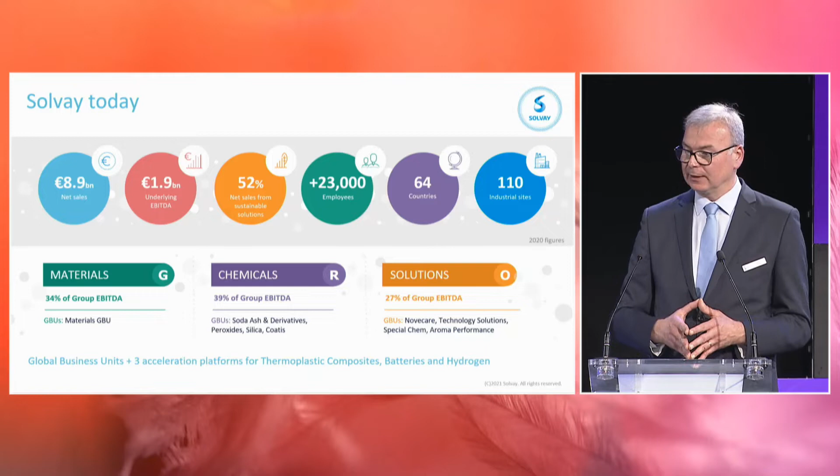One of the key differentiators we feel about Solvay is the pure breadth of materials that we offer. So not only the injection molding materials here on the left-hand side, the high-performance aromatic materials, but we also have fluoropolymers, which are used for high-performance sealing applications. The fluoropolymers are also used extensively in battery technology today. Solvay are one of the leading suppliers of fluoro solutions into battery cell chemistry. We then move into the composites, which we'll focus on today, both thermoset and thermoplastic. But we also have solutions covering adhesives, and we make our own carbon fiber technology as well.

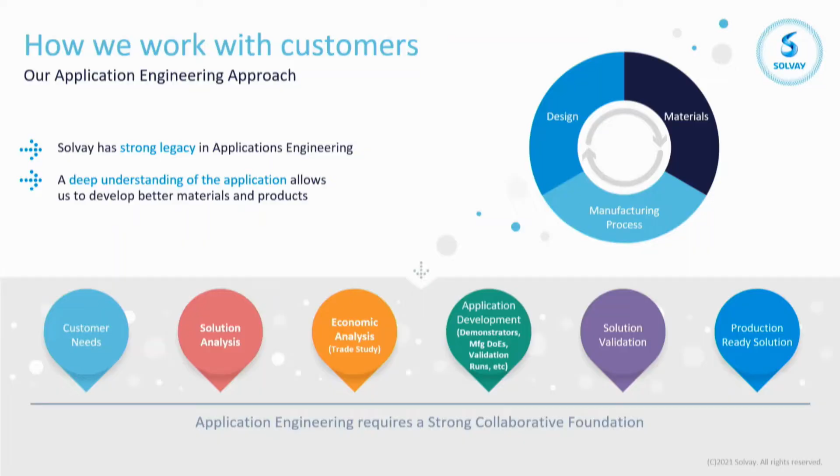One of the most important aspects of this particular project is our approach from an application engineering perspective. So we start right at the very start when we're talking about a concept, and we can support developments and conversations with customers all the way through to the final actual solution. This presentation today will focus more on the early part: understanding the customer needs and coming up with a solution that we believe will bring value.

Just to give you some insight, the second phase of the project, which will be completed relatively soon, will look more into the center of this chart. We'll be doing more of the trade study analysis and more of that deep application development. So again, that's further work that Solvay are working on, but this is our application development approach.

To actually do this work on battery enclosures: Solvay are experts in materials. We're not actually the experts in battery enclosures. Yes, we know a certain amount about battery enclosures and their technical requirements, but to really get deep into the technical content and start understanding the current pain points of customers, we had to work with somebody. We did screen a number of different companies, but in the end we worked with Ricardo on this project.

They're a well-known automotive design and engineering consultancy. They have the expertise in battery technology, not just in cells, but all the way through to battery enclosures as well. So on this project Solvay were bringing the material knowledge, and Ricardo were bringing the background on application performance and the current pain points that they saw on the market from their customers.

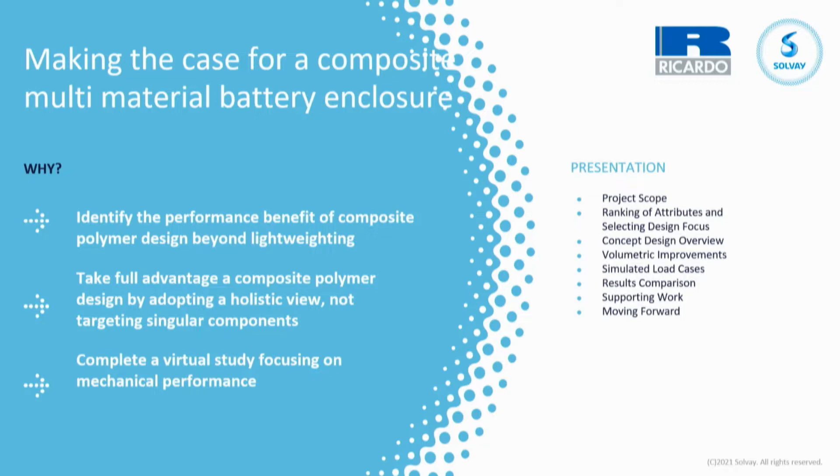So the one thing that I've already highlighted is we wanted to talk about composite materials and not just focus on lightweighting. Very often we see in the press that the value proposition of composite materials is presented as just lightweighting. So we wanted to take a step back and look at the solution at a more holistic level. We didn't want to just look at designing individual components.

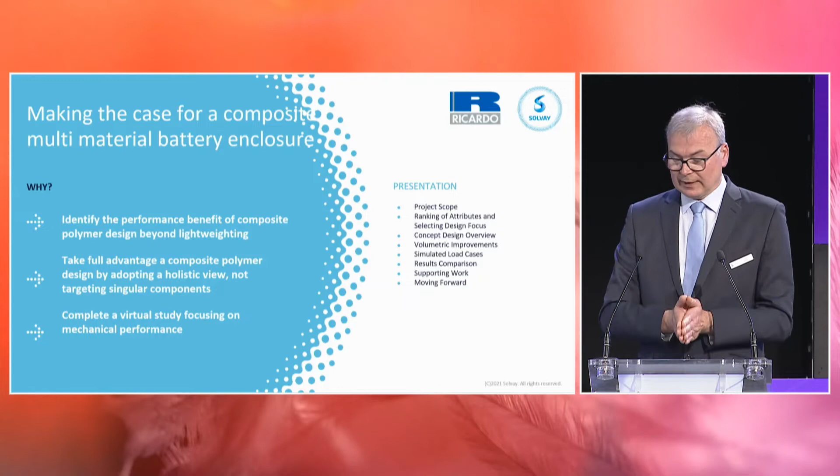We wanted to find out what the real issues were today, and then we could build almost like a mission statement around the project moving forward. The mission statement is important because it provides focus for all of the work that we did in developing designs and using all the advantages of composite materials to solve pain points of the incumbent metallic materials. So teaming up with Ricardo allowed us to have a very strong base.

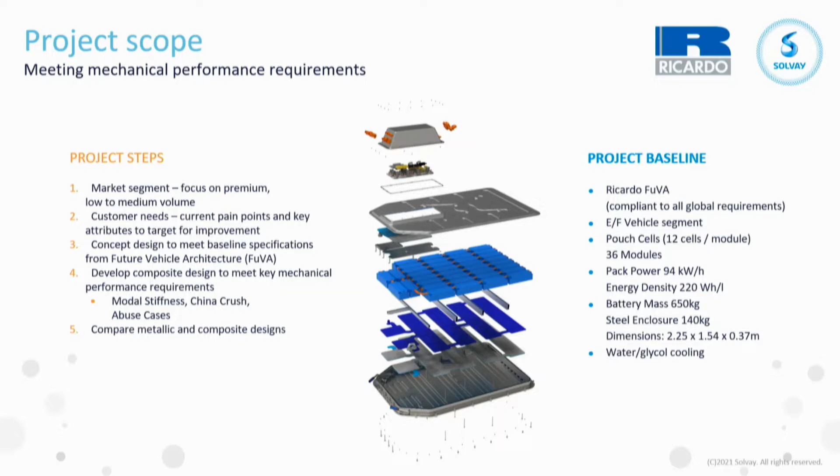The baseline is what is called the Ricardo FUVA battery pack. FUVA, F-U-V-A, stands for Future Vehicle Architecture. Ricardo do a lot of work directly with OEMs, and that work is obviously confidential. So Ricardo have developed their own electric vehicle that they can use to promote their own services and expertise. Working with Ricardo, they gave us access to their incumbent metal battery pack enclosure that is used on the FuVA vehicle.

When we start talking about our solution, we believe that we will be focusing more on the high performance or premium market segment, where we're looking at low to medium volume initially. We started off by really trying to understand what this part has to do, what are all its functionalities, and also what are the current pain points. That would really allow us to start thinking about how this design could look in a composite intensive design to start bringing some customer value.

So right at the end, once we have the design and we've been through this process, this mission statement, we are going to validate the performance again in a virtual engineering environment, but we're going to validate it against what we see as the key mechanical performances, the China crush, the modal stiffness, and some of the abuse shock cases. And at the end, what we will have is a direct comparison between the incumbent steel design and the composite design. So you see a little bit of information there around what the FUVA battery pack is.

It's what we believe is a larger SUV style battery pack. It actually has 36 modules, which you'll see as the blue boxes. In each of these modules, there are 12 pouch cells. Again, we know on the market there is lots of variation between pouch, prismatic, cylindrical cells. There are cell-to-pack scenarios. It's impossible to cover all of it, so you have to base it on something, and this was our baseline. So it's a battery pack with a power of 94 kilowatt hours.

Important here is that the steel enclosure is 140 kilograms in weight. The pack is quite a big pack, and it's a traditional water glycol cooling. So this is really the scope of the project, and this is what I'll be talking about for the next 10 minutes or so, and therefore hopefully leave a little bit of time for questions.

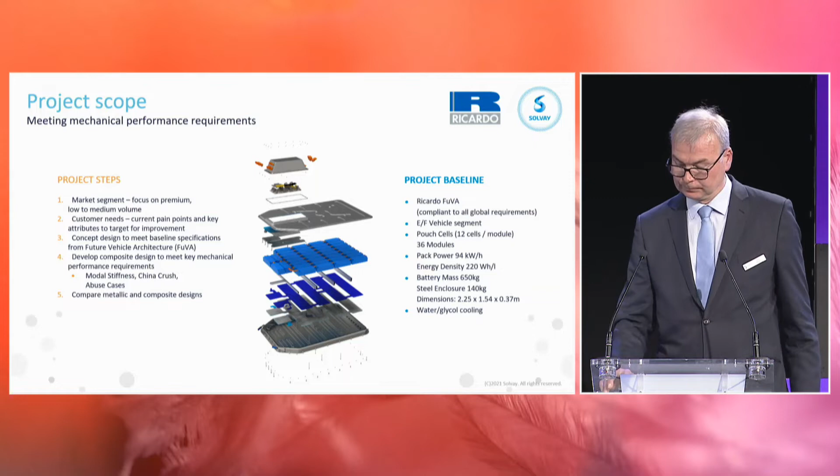So before, as I said, you can really start understanding how to design your battery pack, you really have to understand what are the key functionalities of what a battery enclosure has to do. Someone in Solvay told me that it's just a box, Mark, but it's quite a complex box, and you have to understand what it really has to do. So this is where working with someone like Ricardo really helped us, that we spent a significant amount of time really understanding all of these functionalities, and we understand that they're very much interconnected with each other. So what we did with Ricardo, based on the FuVA vehicle, we did a Pugh analysis, and based on their experience, we came up with a list of functionalities that we could put as a priority.

So number one is obviously safety and crash. That is something that is a pain point for customers. That's what keeps the customers awake. The fire, the burn, the EMI, the structural performance. This is something that you have to comply with. So this was almost a given. You have to comply with the safety and the crash. But then we did other analyses and realized that quite high up, talking with Ricardo, they were saying that the actual volumetric efficiency, so the space within the pack, is also really important.

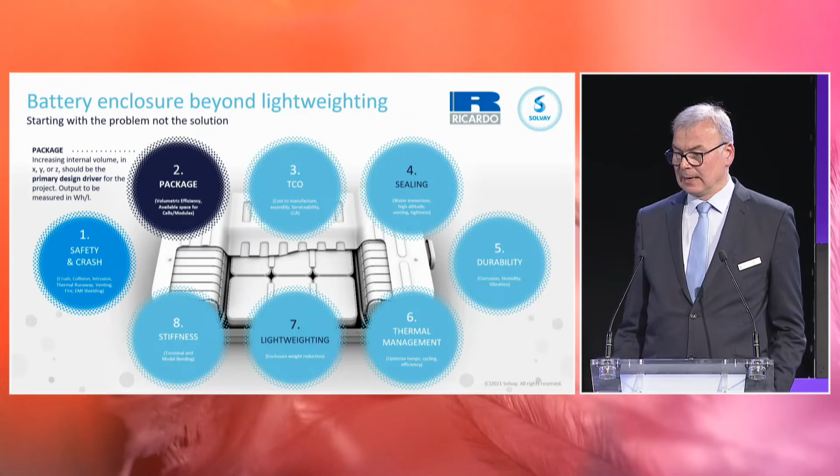And again, with our broad portfolio of materials, the thermoplastic composites that we're developing will obviously fit within that sustainability story. We're doing a lot of work on thermosets as well, which will allow those solutions to be recycled as well. So sustainability is at the forefront of our mind when we talk about materials. When we talk about technical, we really zeroed in on that number two, the package, the volumetric efficiency. This is where we thought that the design flexibility and part integration potential of our materials could really bring a solution. Also, we can reduce the number of sealing surfaces that we observe within the metallic pack. And of course, the lightweighting is a given because we're looking at a composite solution.

So this is our battery pack. We've tried to make it as holistic and agnostic as possible. So we haven't touched the power distribution unit of the pack. We haven't touched the module layer. We haven't touched the cooling system.

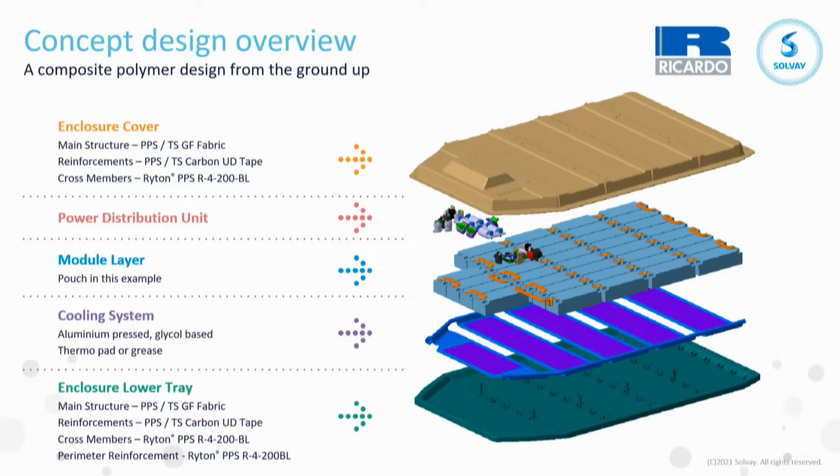But interestingly enough, when we looked at the cooling system, we realized that there was a tremendous amount of benefit in our materials and how it could make the cooling system more efficient as well. But that was outside the scope of this project, so we didn't touch on those middle three. We focused on the cover and we focused on the tray.

And what we realized is that a lot of incumbent solutions have a very structural base, and the lid is just a lid. It doesn't really take part in the structural part of the mechanical performance. So here, what we can do is integrate some more functionality into the top cover, so that can actually contribute more to the structural behavior.

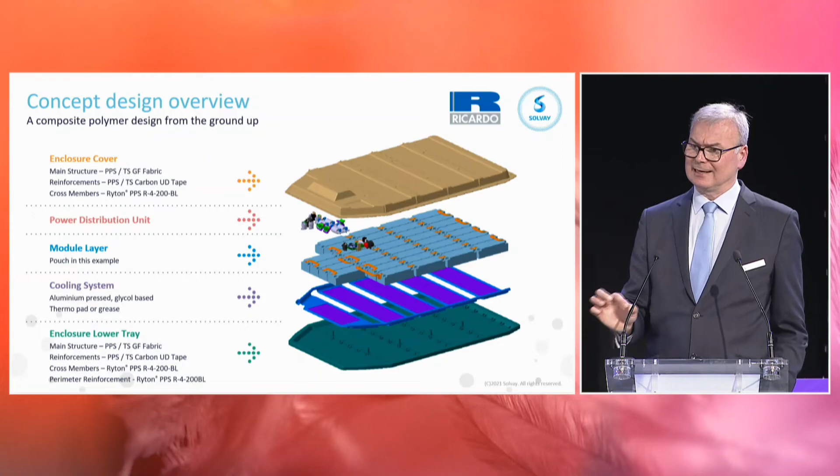So with our thermoplastic technology, we can integrate cross members into the top cover. We can integrate cross members into the bottom cover. Once you're integrating those features, you can introduce things like module retention features in those cross members, and therefore you're eliminating a number of other metallic bolts and other structures. So there's a huge amount of benefit in this integration approach.

What we've also got is a very important perimeter frame design, which is allowing us to meet crush performance. Haven't really gone into too much detail here, but this is something that's very important to the mechanical performance of the actual battery pack.

So if we just focus on that volumetric efficiency, how have we achieved that improvement in space that we see in the pack? The actual packaging volume, where this battery pack has to integrate into the body in white structure, stays the same. What we're trying to do is get more space, which was seen as that key pain point.

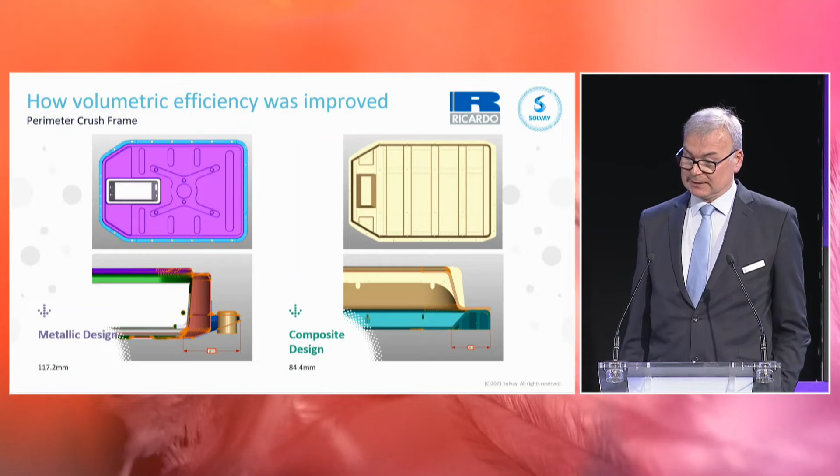So you look at the perimeter crush frame, you see that in the incumbent metallic design, there's around about 120 millimeters taken up by the perimeter frame. In the design that Solvay have developed with Ricardo, we've reduced that down to just under 85. So when you look at benefiting that amount of volume all the way around the pack, that starts to become something that's significant.

What we also observed in the metallic pack was there are quite a lot of cross members involved in achieving that mechanical performance. And each of those, both longitudinal and lateral cross members, take up space. Every single one takes up almost 25 millimeters of space, which means space that can't be taken up by cells, which are the most important part of a battery enclosure.

So with a more integrated design approach, you can still get the structural performance, but you can save a lot of space within that composite design. And also, depending on your module size, you can integrate a lot of module retention features in these cross members as well.

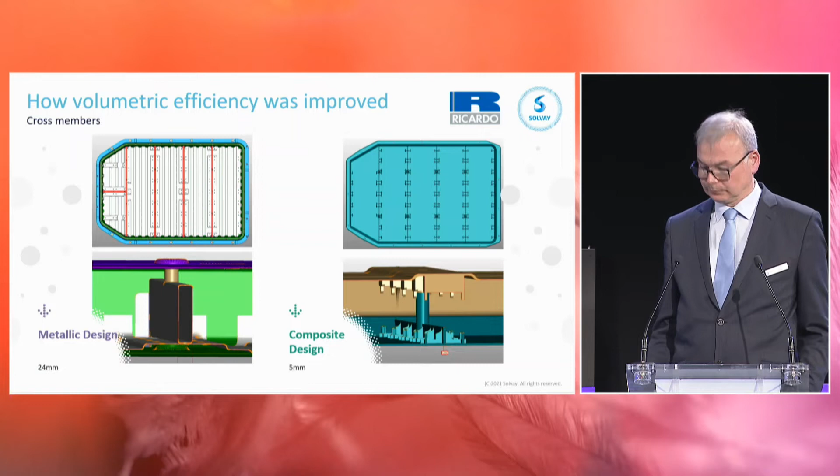Also, it's not just the cross members, it's not just internal, it's also the actual Z height. Z height can be very important in some vehicles, particularly because the passengers sit above the battery pack. It's maybe not a tangible value, but if you can create more space for rear seat passengers, they really see this as a benefit. That came out in some discussions.

So what we can see is in the metallic design, the power distribution unit is sitting very proud on top of the metallic pack. What we've been able to do is bring that power distribution unit more internal, so it's still protruding at the top, but it's a significant reduction in height. And with our design, we've been able to minimize the lid and the base, so again you get some improvement in that overall dimension.

So you start combining those overall dimensions together, you start to get an idea of what that space can be. If you understand what that space is, you can start designing modules and cells to take advantage of it.

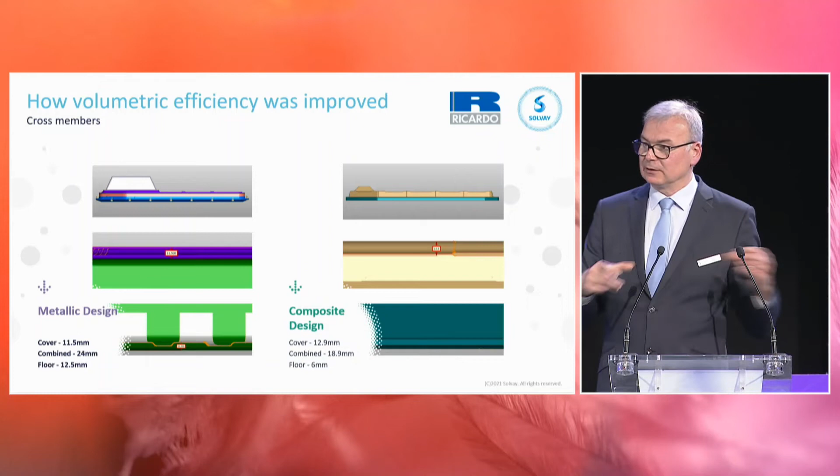Once we had the design, Ricardo did the simulated load cases. The main one we were looking at was the China crush. I know there's been an updated China crush since, the Chinese 2020 standard, which is important to talk about in the second phase, because that's bringing in new regulations for thermal runaway.

But the main part here is to make sure the battery pack at any location around the exterior can meet the 100 kilonewton load case. So we tested 5 locations around the pack, some of them in line with the cross members, some not, and all met the 100 kilonewton.

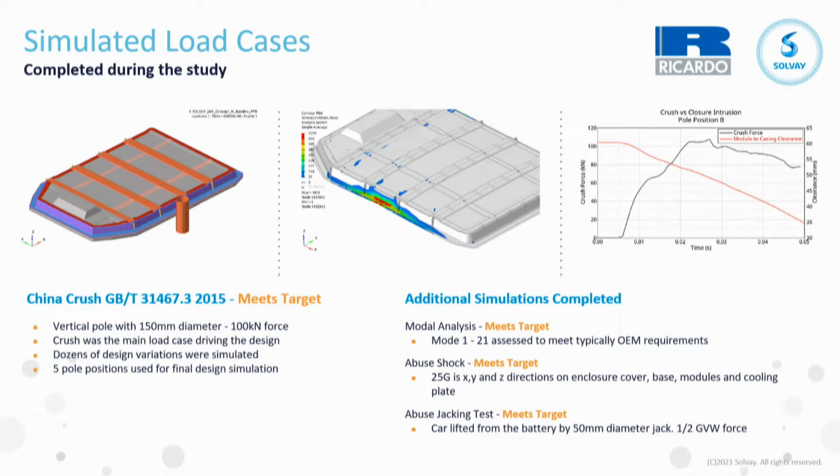We have spoken to some customers, and they've said, well, yes, the 100 kilonewton is achieved, but normally we would want a little bit more safety margin on that. So that's another reason why we're going into a second phase, to improve on the safety margin of this China crush.

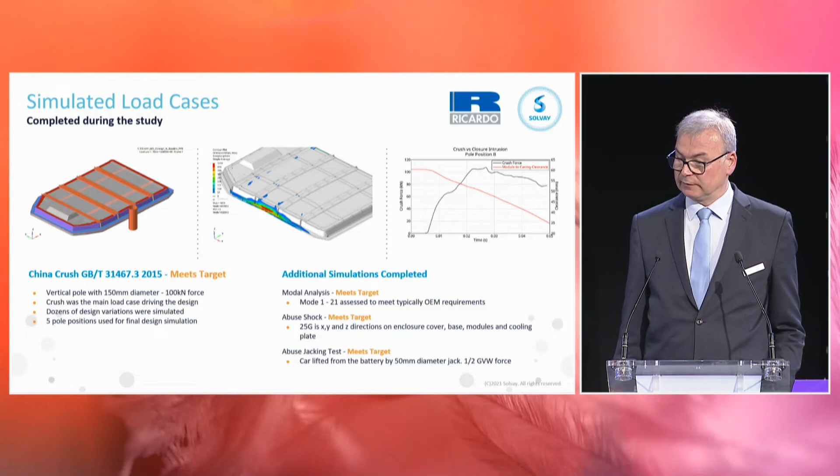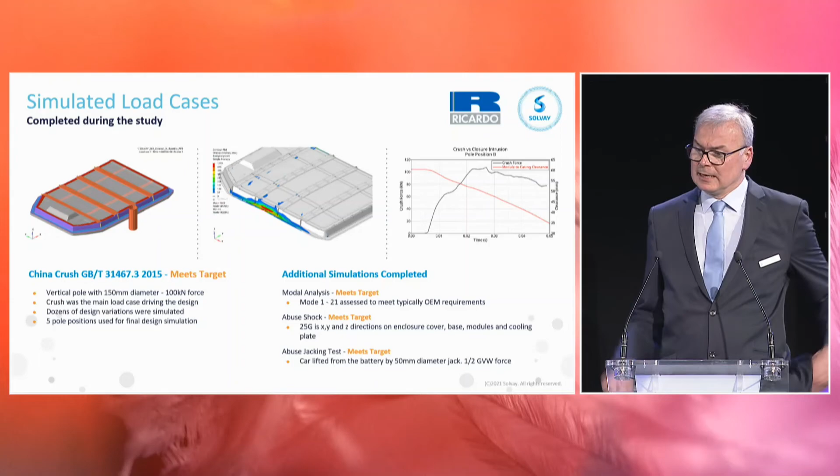The other aspects: we needed to meet the modal stiffness performance within the vehicle from modes 1 to 21. That was all successfully completed. We did a 25G abuse shock, and also did underfloor jacking performance as well. So as this was a proof of concept, these were the key mechanical performances that we wanted to perform, just as a look and see: okay, we've got some potential benefits in volumetric efficiency, but does it really have the potential to meet the performance that this battery pack has to meet? And here again, there are some positive indications that this is a battery enclosure that has potential legs to bring some customer value.

So when we put a side-by-side comparison, the key standout is the volumetric density, which is the watt-hour per litre. The metallic design, the steel design, had 220 watt-hours per litre, but with the space that we developed and putting cells in all that space, we've been able to increase that to about 270. The volume of the enclosure, so the volume taken up by the material, is significantly lower as well. Even without using lightweighting as a driver, we have reduced the weight by about 75 kilos. So even though lightweighting is not important, 75 kilos is still significant. And we're producing a lower number of structural parts, and obviously that Z height has been improved as well.

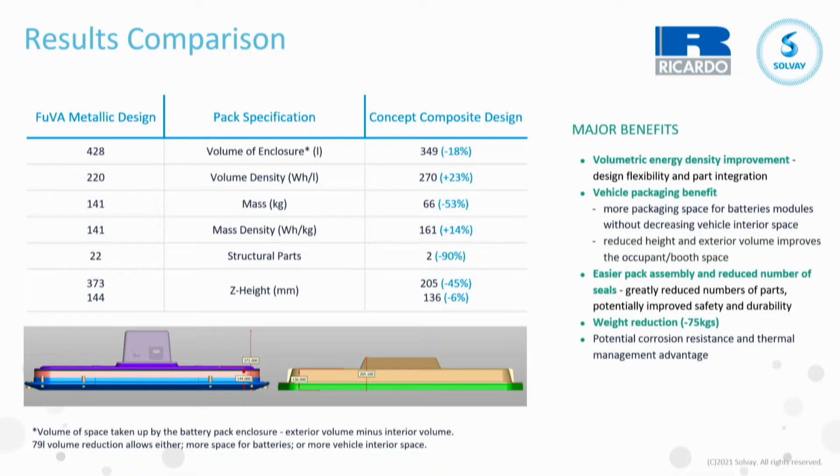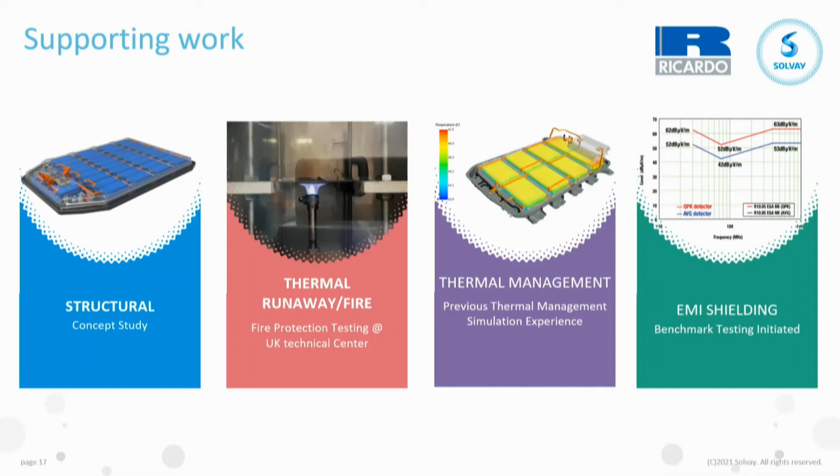So there's a lot of other work going on. I'm just conscious of time. What I'm talking to you about is the conceptual design. There's lots of other work going on at Solvay right now. We're doing huge amounts of work on material testing for thermal runaway and fire, really answering the current industry's requirements. We're doing a lot of work on thermal management and a significant amount of work on our materials for shielding as well, because all these are important to answer that safety question.

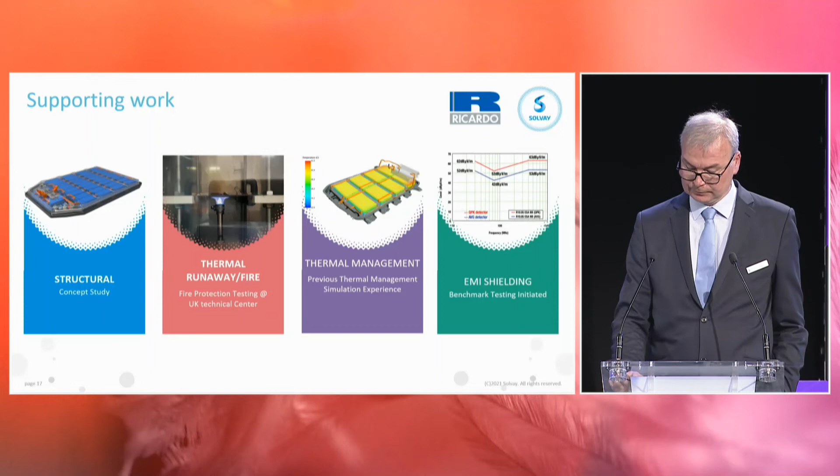So moving forward, as I mentioned, we're in the second phase of the project, which should be completed very soon. We're going to be finalizing our material characterization for fire protection, thermal runaway and EMI shielding. We're going to go further on the mechanical. We've got potentially very positive results in the first phase, but we need to go further. We need to start understanding how this solution performs in vehicle crash. We want to mature the design, and we want to go further in simulation around thermal management. And of course, we're very much open to having more customer engagement as well.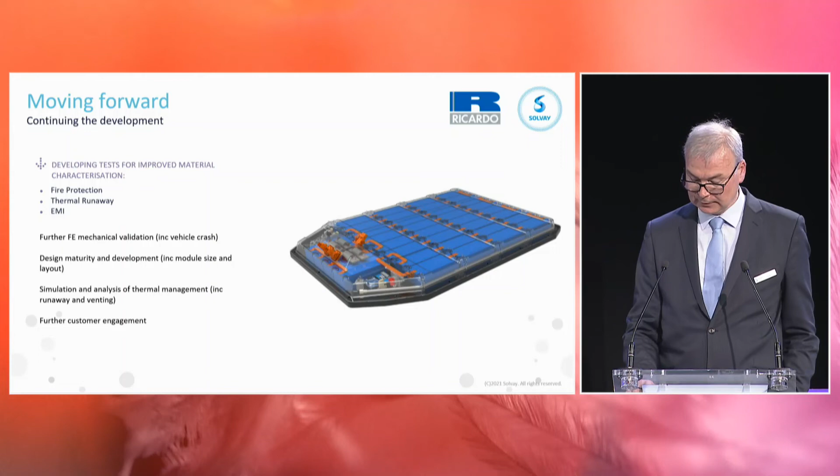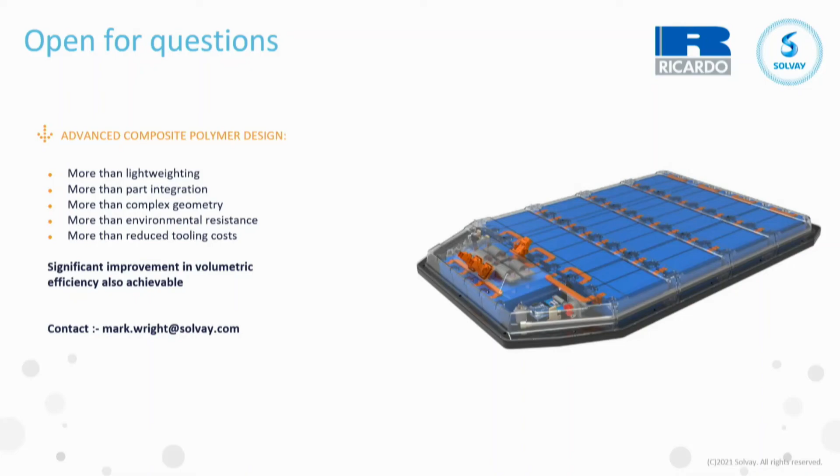So this is my final slide. At the start of this project, we wanted to talk about composite design and not just about lightweighting. We think it's more than part integration. It's more than achieving these complex geometries. It's more than having environmental resistance to the end environment. It's more than having reduced tooling costs and a reduced number of tools. What we've uncovered is that we believe there's a significant improvement in volumetric efficiency that can be achieved within a composite battery pack. We're not so naive to think that this is a design that can go everywhere straight away. We're talking about a high-performance battery pack, used in a UAM environment where lightweighting is significantly more important, but also in the premium luxury sector of automotive as well.